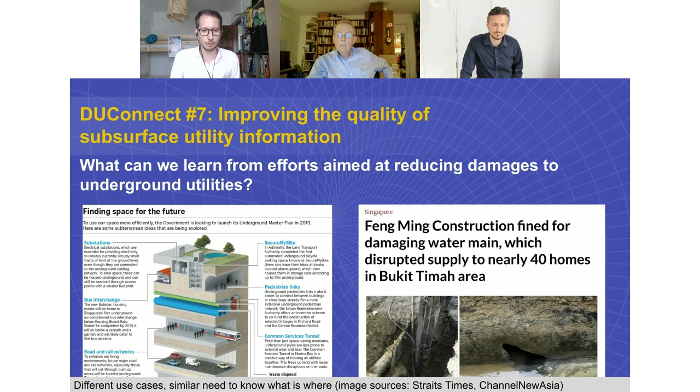That's why I'm very happy to have Geoff here. So we will move on to the main talk, which is titled 'Reducing the Risk of Underground Utility Damage Improves Construction Productivity' by Geoff Zeiss. Let me briefly introduce you before I'll hand over the floor to you.

Geoff tracks the contribution of geospatial technology to the digitalization of the construction and energy industries on his Between the Poles blog and other media. His area of special focus is locating, mapping, and sharing information about underground utility infrastructure. A white paper called 'Reducing Damage to Underground Utility Infrastructure During Excavation,' prepared by Geoff and Dr. Sakura Shinoaki, was recently released by GITA. In recognition of his efforts to increase the awareness of geospatial data and technologies in utilities and construction, Geoff received the Geospatial Ambassador Award at Geospatial World Forum 2014 in Geneva, Switzerland. He's also a member of the Digital Underground project of our advisory board, and he actively supports open standards as a director of the OGC, the Open Geospatial Consortium.

That's where Geoff's biography ends, and I just want to add a few more words to that, because Geoff, we're very happy to have you here. Sometimes when I talk about you to others, I jokingly call you a bit of a social media influencer, and I mean that in the best sense of the word. We're in a very technical, almost niche kind of world, but if anyone is considered an authority globally, I think a lot of people think about you when it comes to utility mapping, but also making data available. I think many of us in the field really appreciate what you've been doing in the past years or so, tirelessly capturing all kinds of things going on all over the world related to underground utility information, but also geotechnical information. I think we're just very happy to have you here.

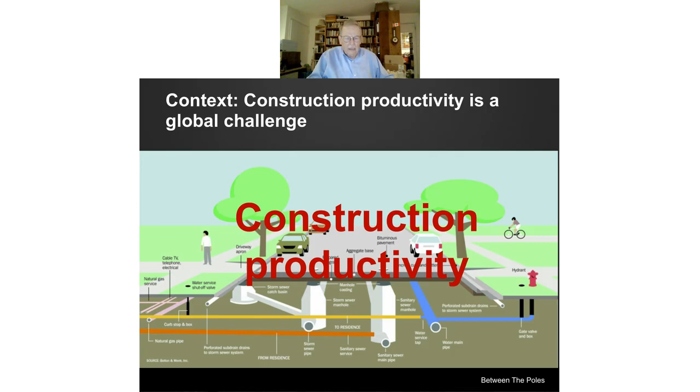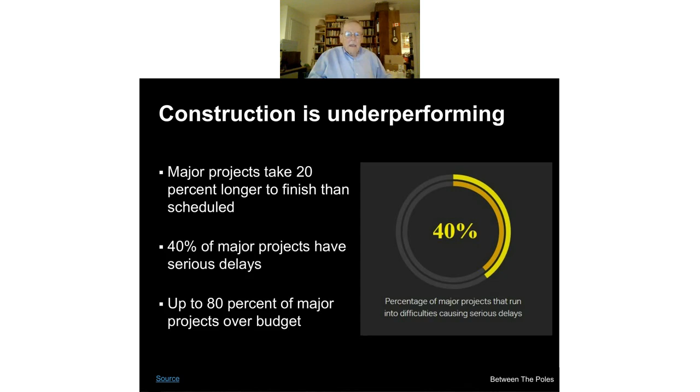One reason it's a big problem is there are more and more issues with major projects and other types of projects. These are some statistics from North America showing some of the problems with construction projects. If you're familiar with any major construction projects, you realize there's a high probability they'll be delayed and go over budget. This is an overview of some of the problems with the construction industry.

There are thousands and hundreds of thousands of contractors who do very specialized work. This is not a business of 3 or 4 big companies who do everything—there are thousands and thousands of small contractors. It tends to be adversarial. As a friend of mine said, when you do construction, you spend half your time actually doing the engineering, and the other half in litigation. It's characterized by low margins. In the UK, for example, the top 10 construction contractors, with an annual turnover on the order of 30 billion, have a margin of 0.35%. You wonder why anybody does construction with margins like that—they certainly wouldn't build airplanes and cars with margins like that.

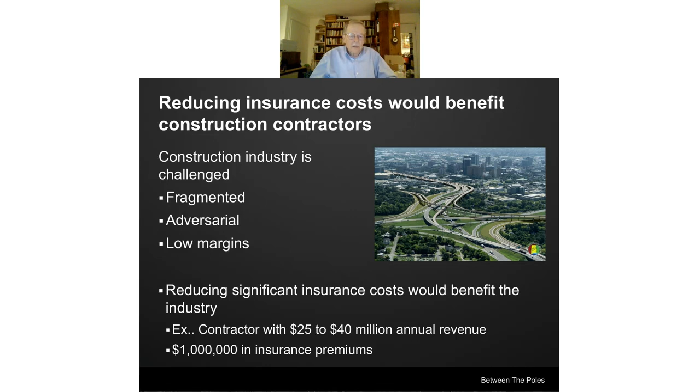One thing that's interesting about construction is that given those low margins, the industry pays significant insurance costs. If those costs could be reduced, it would contribute significantly to improving margins. These are some numbers I got recently from an insurance company in the U.S., estimating that a contractor with annual turnover of 25 to 40 million would pay $1 million in insurance premiums—that's a percentage of their turnover. Given their low margins, it would be really beneficial to reduce the risk of damage, which would translate into reduced insurance premiums. That gives some context for why this matters to the insurance industry.

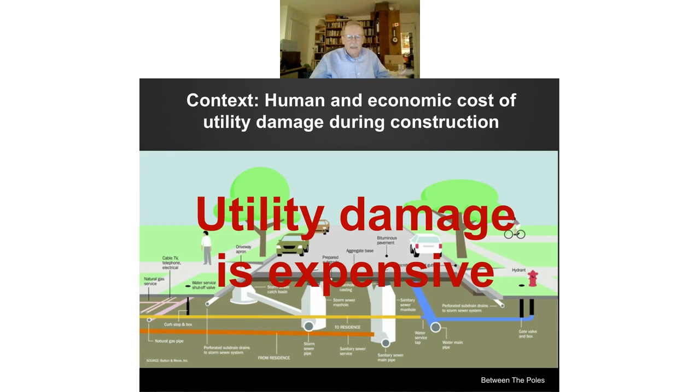The other thing about utility damage is that it's expensive—financially and economically—but it also costs lives and injuries. These are some numbers from around the world. The 50 to 100 billion annually in the U.S. is my estimate based on numbers from the CGA and research in the UK. In the UK it's harder to put a number on, but it's estimated to be billions of pounds. If you prorate from the US, assuming the UK is about 20% of the US population, you can figure out what that number might be. In the Netherlands, they've estimated something on the order of $1 billion.

The really interesting thing is whether these numbers include not only direct costs—what it costs to repair the pipe—but indirect costs: loss of custom, disrupted traffic, insurance costs, cost of litigation, and a long list of other indirect costs usually not included in these figures. Just to give you an example of two really important incidents, this happened in Belgium in 2004.

I'm sure that any folks on the line from Europe will remember this. This was just a devastating experience, and it was one of the reasons why in Flanders and in the Netherlands there are now sites dedicated to sharing information about the underground. It's called KLIP, K-L-I-P, in Flanders, and CLIC, or KLIC, in the Netherlands. I'll talk about KLIC a little later. But this was a devastating experience.

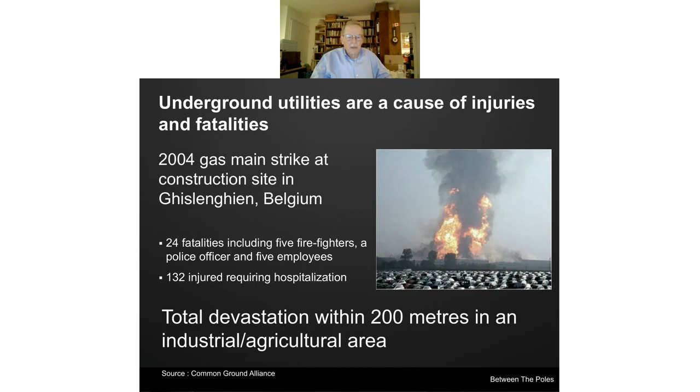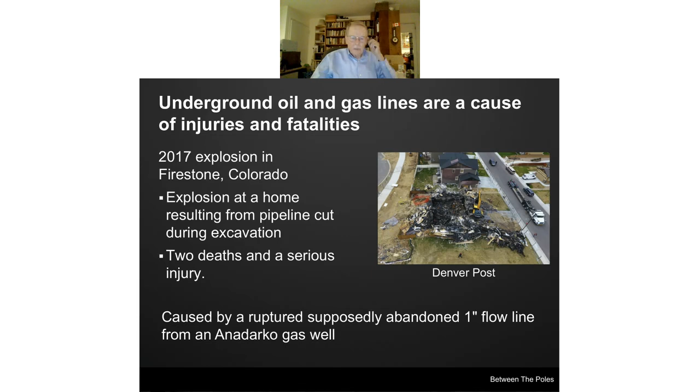This is a really important one. This happened in Firestone, Colorado. This also led to legislation. This happened in 2017, and by 2019 there was really radically new legislation in Colorado, and I'll talk about that. It led to a couple of deaths and a serious injury, and it was caused by a one-inch natural gas flow line from an Anadarko gas well.

Now you may say, well, this is just the way things are. There's things that are underground. We don't know where they are. We try to do things. We try to dig carefully. We try to take other measures to reduce that risk, but that's just the way business is. And if you look at the Netherlands, or the US, or the UK, the statistics are similar.

I'll also talk about Heathrow Airport, where they have also managed to do that, and they have statistics carrying from about 2003 which show a steady decline in the number of incidents, no matter how you define them, at Heathrow. So I think the important message is that something can be done about this, and I'll try in this talk to give you some indication, not from a technical point of view, but from the point of view of organization, of how to achieve something like that.

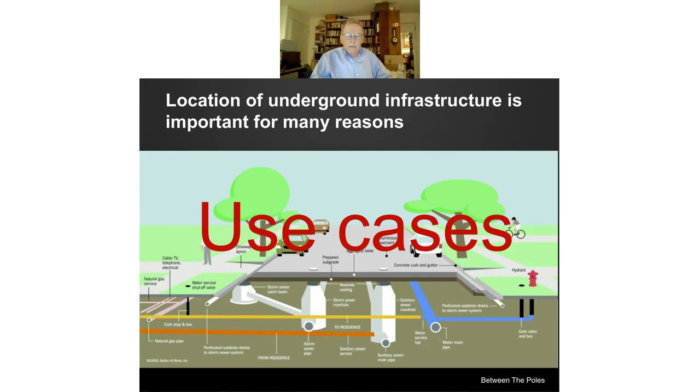There's a number of use cases that relate to how underground information can be used. Some of these were defined by Singapore. Some were defined in the UK as part of the National Underground Asset Register project. But these are just a few of them. Of course, street excavation is the obvious one, but this information is also very important for emergency response. You may want to know what's underwater, or what has been impacted by a flood, for example. Utility maintenance is obviously very important, to know where things are underground.

If you have an outage somewhere and you want to know what caused it and go find that piece of equipment, you can either — in Canada, for example — wander around in the snow looking for it, because the accuracy of as-built is pretty poor, and you have to use other means to try to find it.

Large-scale construction projects need to know where these things are because they often have to do relocations. If you're doing a highway project or a rail project, you have to relocate some utilities to make way for your project. It's obviously useful for disaster planning, smart cities, digital twins, strategic urban planning, and I could go on, but those are just a few of them. In this talk, I'm going to concentrate on street excavation, utility maintenance, and large-scale construction projects, which was really the focus of the NUAR project in the UK.

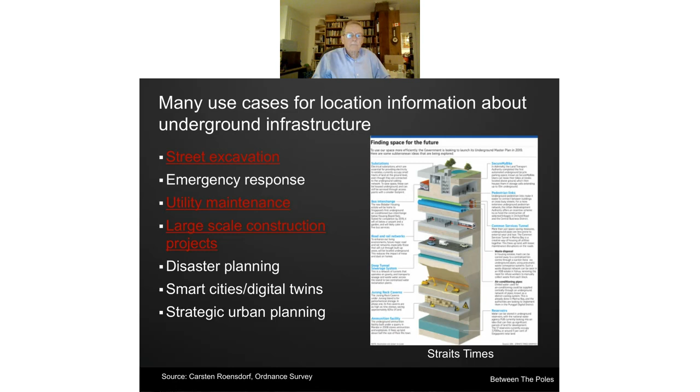So what I'd like to now do is go through some of the initiatives that I'm aware of worldwide that indicate what people are doing to solve this problem. And there's really two aspects to this.

One is, what do we do to record the location of new infrastructure as we put it in the ground? This, in the past, has generated what are called as-builts. And in many parts of the world, those are not really as-builts, those are as-designs. What actually goes in the ground is not what's recorded on the as-built.

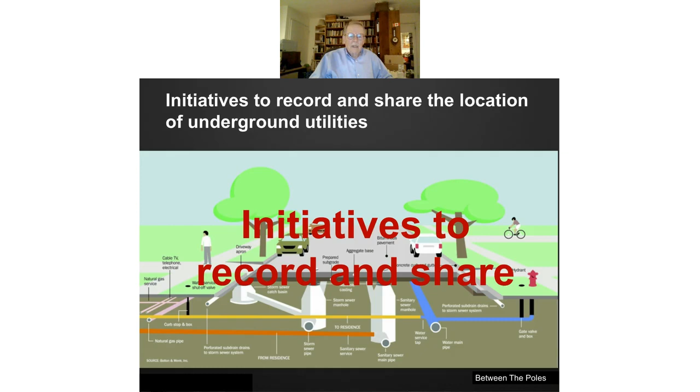And that is one of the real sources of major problems. The other aspect of this is, where is the existing infrastructure, and how can we improve the quality of our location information about existing infrastructure? I'll talk about some of the ways that some organizations are trying to do that.

Just to give you some context, it's estimated in the US that something like $10 billion is spent annually finding things underground. And as I said at the beginning, this information is rarely shared. It's usually recorded for the project, but after the project completes, that information is lost.

And if you come and do a project involving excavation in the same place, pretty much the same process will happen. You'll call the one call center, people will come out with their magic wands and GPR push carts, and they will try to find all that stuff again. They'll paint the ground, and that can happen year after year. That is a real waste of $10 billion.

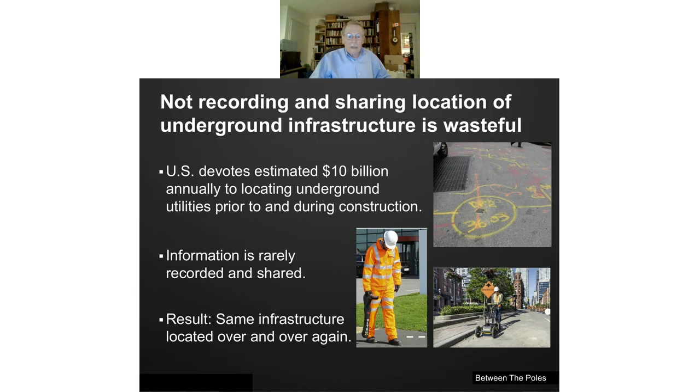A number of jurisdictions around the world have tried to deal with this problem. These are just a few of them that I'm aware of. I won't go through all of these, but this is worldwide, where people have recognized the problem and are trying to address it.

I will mention that Tokyo was one of the first that tried to do something about this, with a system called RODIS — it was actually the Road Information Center, RODIC, but the system was called Road Information System.

I guess the way I would put it is that if Moses stuck his staff in the ground in Tokyo, he'd hit a lot more than water. He'd hit telecommunications, electric power, a lot of underground infrastructure. It's the same thing if he stuck his staff in the ground in Heathrow Airport, and we'll come to that later.

There are different ways that people are organizing the sharing of information. In some jurisdictions, the government just comes in and says, you have to do this. PHMSA in the United States is an example, and I'll spend some time on that. But there are examples around the world where it's basically government mandate.

Thou shalt do this. In some cases, it's government voluntary. Scotland, for example — the Scottish Vault system was originally, and still is, government sponsored, but it's voluntary. The utility operators don't have to do it; they're not required by law to do this. Legislation has been passed in the Scottish Parliament to make this mandatory, but as of right now, it is still voluntary.

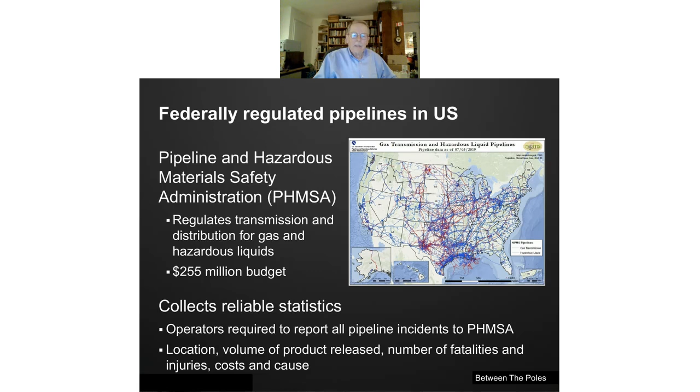This is not just construction damage, but any kind of leakage involving pipeline. Federally regulated pipelines have to be reported to PHMSA, and it includes quite a lot of information: the volume of product release, the number of fatalities, injuries, costs, and cause. This is probably the ideal of the kind of information you'd want to collect for these incidents.

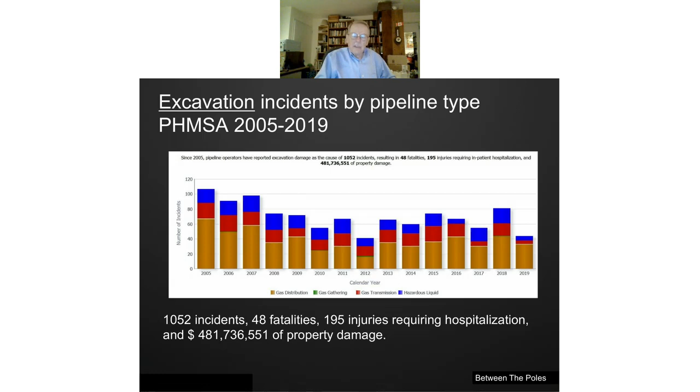They publish statistics starting around 2005, and these are some of the statistics specifically for excavation incidents over that period of time. You can see there were 1,000 incidents, 48 fatalities, 195 injuries, and $500 million of property damage. That's very useful information. You can get similar information from the KLIC system in the Netherlands, for example.

Now, this is a very recent initiative—I think it began only about a year ago. This is in Montana. It's basically a regulatory rule that specifies you have to do an as-built survey, accurate to about 1/3 of a foot—3 or 4 inches, somewhere between 8 and 10 centimeters. Most importantly, it has to be certified by a professional engineer or professional land surveyor. To put it bluntly, that means there's somebody you can sue.

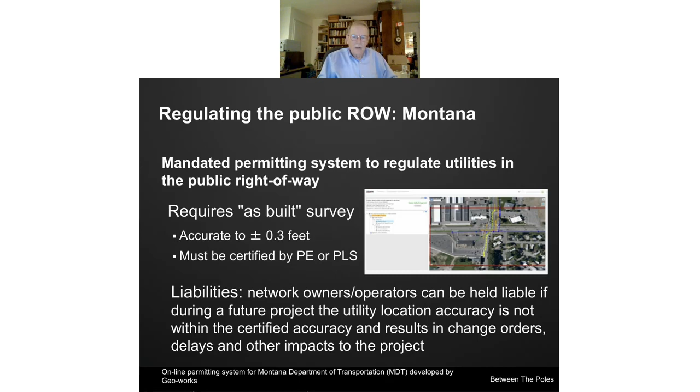That points to the whole issue that's always the elephant in the room, and that is liabilities. This regulation specifies that network owners and operators can be held liable if, during a future project, information about where this new infrastructure was installed is not accurate. Now, that's maybe what the law says. In practice, something else often happens—you're dealing with a small contractor up against a large utility, and the large utility has a lot of lawyers, the small contractor doesn't. So in practice, almost invariably the contractor is held responsible. We'll come back to that.

Another example is Colorado, and this is a bit different—I think this is one of the things we're going to see increasingly around the world. In one-call centers in North America and elsewhere, you're required to call the one-call center 3 days before the construction contractor or excavator puts a shovel in the ground. Not before design, not during planning, but 3 days before you put the shovel in the ground. So you're doing all your design blind—you have no idea what utilities are out there. You design as if it's greenfield, as if nothing else has been out there before.

This is what I think is really remarkable about the Colorado legislation: it requires a subsurface utility engineering survey prior to design. That means you have to know where things are to ASCE quality level B, using remote sensing technology prior to design. So instead of just sending the survey crew out to find the above-ground stuff, you now also have to know where all the below-ground stuff is before you do design. This is going to dramatically reduce the number of unnecessary and expensive utility relocations. So that's really a groundbreaker.

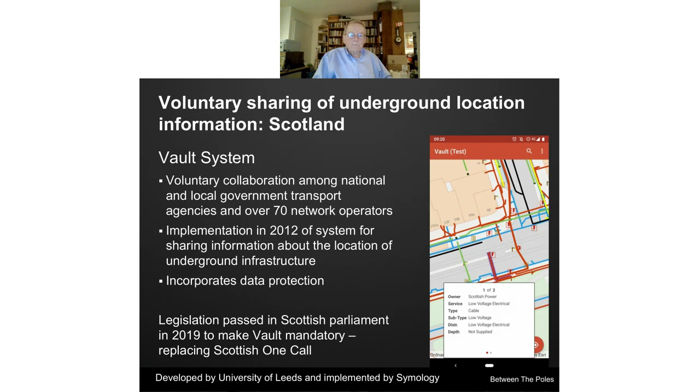It's different from the KLIC system in the Netherlands, for example. The KLIC system in the Netherlands basically relies on as-builts. You contact the KLIC system, you say this is where I'm going to dig, and within, I think for almost 95% of cases, within 24 hours, you'll have access to all the as-builts from all the utilities and telecoms operating in that area.

In North America, that's not the way it works. You contact the one-call center, and because as-builts are notoriously inaccurate, what typically happens is several vans converge on your site using electromagnetic wands, EML, and ground penetrating radar sensors in some cases, and they paint the ground. It sounds a little more labor intensive, which it is, than the KLIC system. It's not as efficient, but it is more reliable than using as-builts.

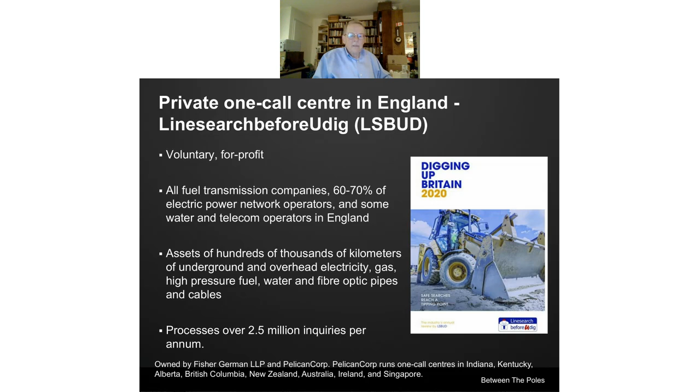As I mentioned, in England and Wales there's a LinesearchbeforeUdig system. This is actually a private company, owned partly by Pelican Corporation. They don't cover all utilities in the UK, but they cover all the hazardous fuel transmission, gas and oil, and a high percentage of the electric power networks and some other things as well. They process 2.5 million tickets every year for people wanting more information about what's underground.

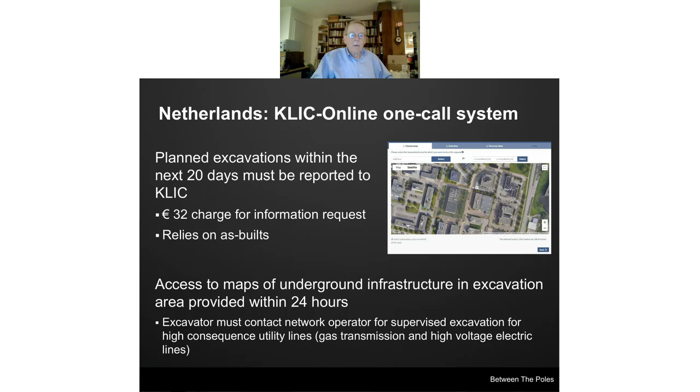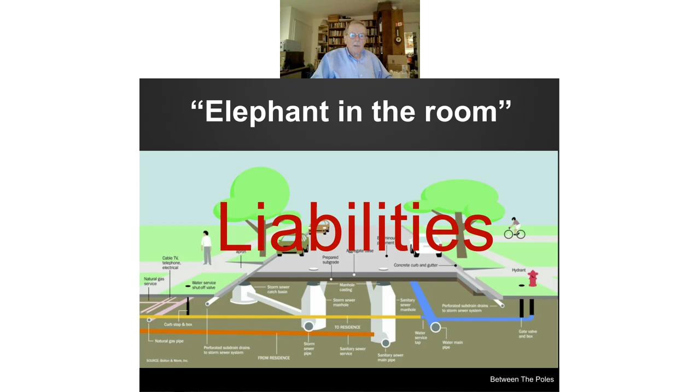Now, this is the elephant in the room that I mentioned, liabilities, and I'll talk briefly about some of the ways people try to address this problem in different parts of the world. As I said, there are alternative liability models. The major one in many jurisdictions is that the contractor is liable—this is not by law, this is just by the way things work.

The construction industry is fragmented—there's a lot of small contractors, and for a small contractor to go up against a big utility is usually considered a waste of time. So in most jurisdictions, though not always—there are cases where a large contractor will take a utility to court, recently in San Francisco there's a $500 million suit in California—but in most cases the contractor is liable. This applies in the US, UK, Canada, Australia, and other places.

In France, there's what's called a network owner-contractor shared liability model, where there are rules that say if the location of the asset that was struck was reported accurately, then it's the contractor's responsibility. If it was not reported accurately and the contractor hit it, then it may be shared 50% to the contractor, 50% to the owner. Or if it was really unreliable, then the network owner is totally responsible for the liabilities.

I'll talk a little bit about Montana and Calgary, where there's an attempt to make a shared liability problem. But again, these are North American jurisdictions, and the reality is often that the contractor is responsible.

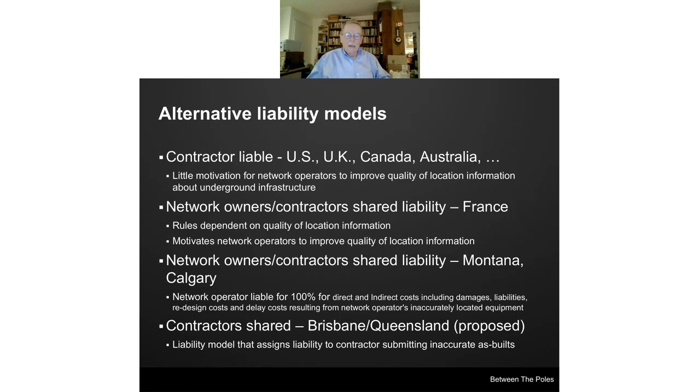There was a very interesting proposal, which I don't know whether it was implemented, in Brisbane, Queensland, where the contractor that put the infrastructure in the ground, working for a network operator, submitted as-built drawings. When anybody else came and worked in that area, those same as-built drawings would be provided to those contractors. If that contractor found problems, the original contractor could be sued for it. In other words, the network operators weren't really involved — it became a legal problem between two contractors. It's an interesting idea, but I don't know whether it was actually implemented.

State of Montana — this is a big thing, similar to what has happened, not mandated in Singapore, but has happened de facto in Singapore. The most important aspect is that as-built drawings have to be certified by a PE or PLS — a professional engineer. And when you say certified by a professional, that means they can be sued, and that means liabilities.

The law in the state of Montana also says that network owners and operators could be held liable if their data is inaccurate. Now, in practice, it may be different. The law sounds good — it sounds like the network operator would say, okay, that's my fault, I have to take responsibility for it. The reality is that often the onus still remains with the contractor.

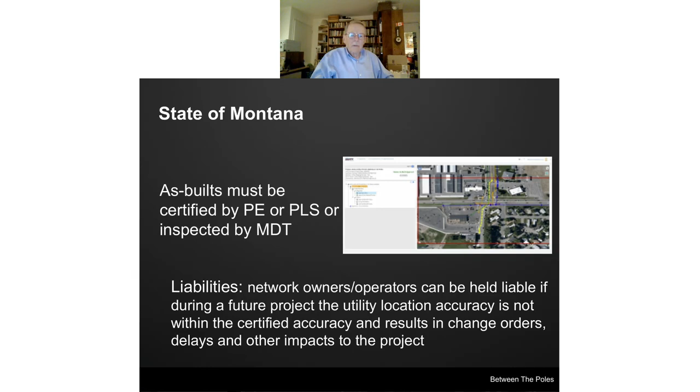The City of Calgary has something similar. Many years ago, they passed a law that said any underground work in the city had to result in the submission of as-built drawings to the city with a specified accuracy, according to Canadian standards for quality. It provided for inspections by the city and specified shared liability models based on how accurate the as-built drawings were. Again, in practice, what actually happened may not be what you'd expect by looking at the bylaw.

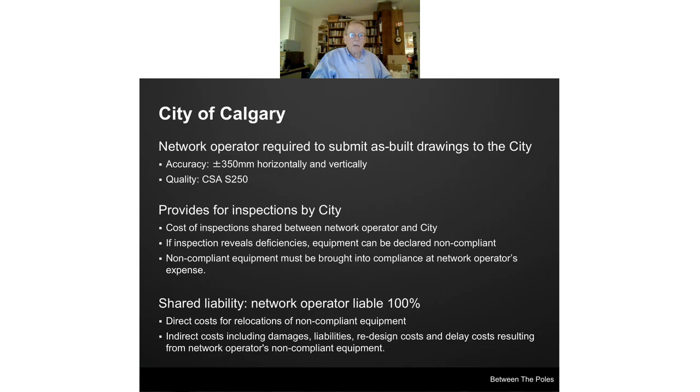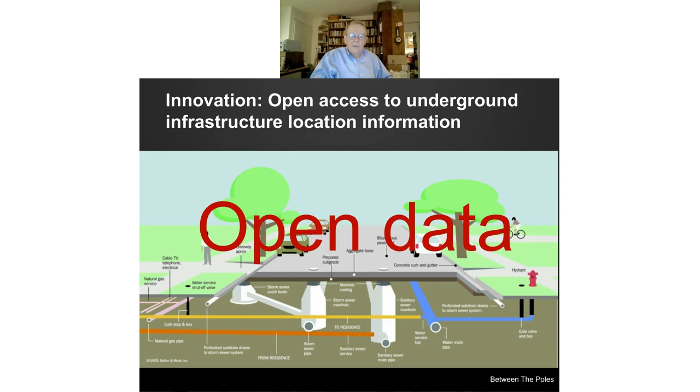Now, one of the most interesting things happening these days is open data. This has affected water more than anything else, but it's beginning to affect other things. I'll give you a really interesting example for oil and gas in Colorado, and also what's happening in the city of Rotterdam. This was the result of the Firestone disaster, because that was a flow line from a natural gas fracking well in Colorado — there's something like 17,000 miles of flow and gathering lines in Colorado.

As a result of that, legislation made the COGCC responsible for collecting data about the location of these lines — not highly accurate, something like 25 feet or so. But the most remarkable aspect was that this data is publicly available on a map. If you're interested, I can send you a link so you can see all the underground flow and gathering lines in the state of Colorado, which is remarkable. I think it could be a model for other places to adopt as well.

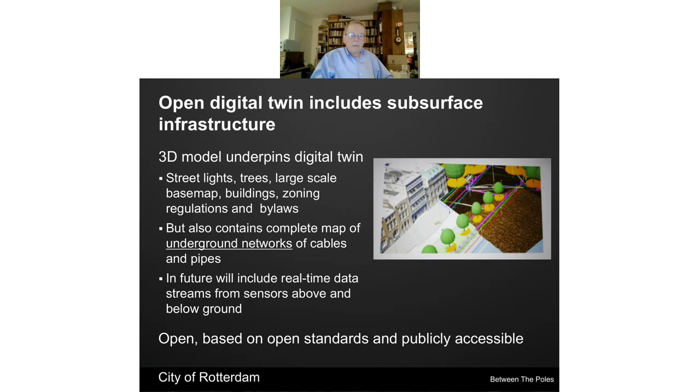This is what I mentioned about the city of Rotterdam, where they are creating an open digital twin of the entire city, including both above ground and below ground. This was also the objective of the Iceberg project in the UK, to make sure underground infrastructure was included in the digital twins of London and other UK cities. The interesting thing about Rotterdam is that this is open data, based on open standards and publicly available. So that's open data.

Another aspect of this is reliable statistics, and this is really a big problem, because as Peter Drucker said, if you can't measure it, you can't fix it. I'll give you some examples where we say, well, we've done all these wonderful things, and we think we're reducing the number of incidents of underground damage and the total cost of underground damage.

And the fact is that often the statistics show that that is not what's happening.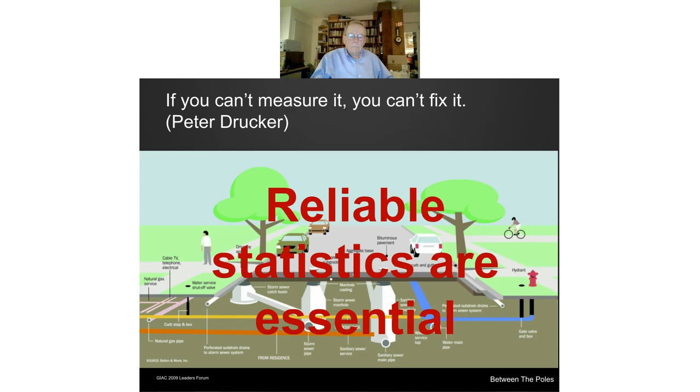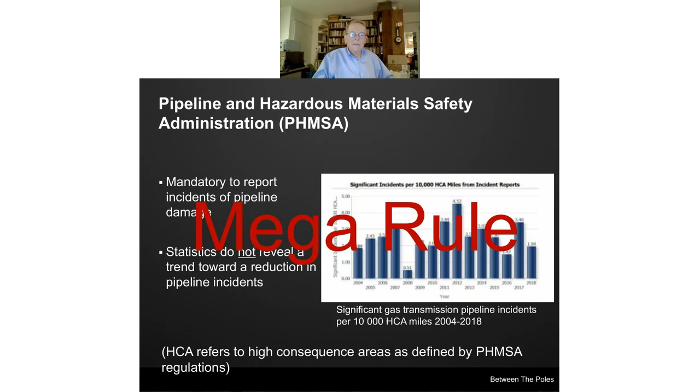I mentioned PHMSA before, the Pipeline and Hazardous Materials Safety Administration in the United States. Their statistics have this HCA designation, which lets them prorate stats to give you some idea of construction activity and miles of gas pipeline. In the U.S., PHMSA statistics show that, in spite of everything PHMSA has done, there has been no reduction in damage.

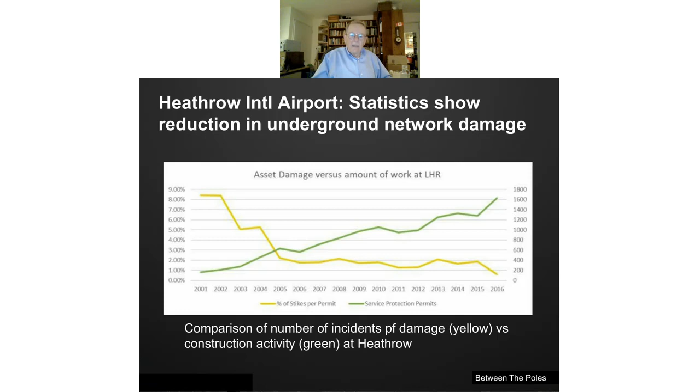This is Heathrow Airport, in contrast, where the green line gives some indication of construction activity, and the yellow line shows, since about 2001-2002, the number of incidents of underground damage resulting from excavation. You can see it has steadily declined.

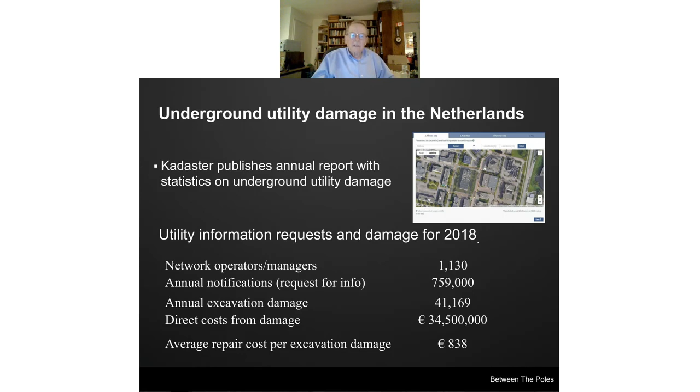I'll also mention KLIC in the Netherlands, where some very interesting statistics are collected because it's mandatory to report incidents: 759,000 notifications every year, 41,000 incidents, and you can see the total costs and cost per incident. The statistics show that so far the KLIC system has not reduced utility damage during excavation. It's had some other remarkable achievements, but it has not reduced underground damage during excavation.

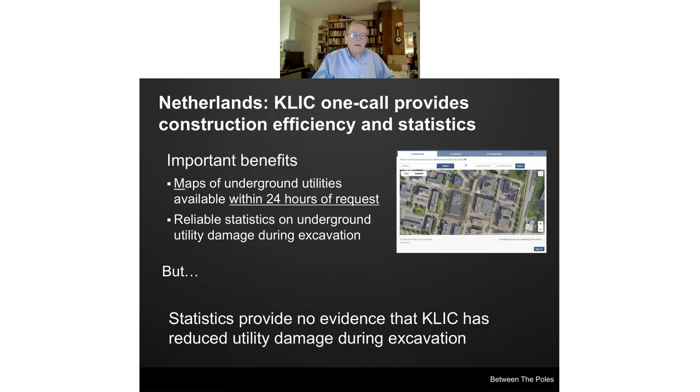So I think the conclusion is there's no silver bullet. If you look at what's happened in Japan, where there has been a comprehensive program since 1985, it has resulted in a remarkable low number of incidents. I won't go through all of these things, but it involves construction contractors, network operators, governments—all stakeholders in building, constructing, and maintaining underground infrastructure.

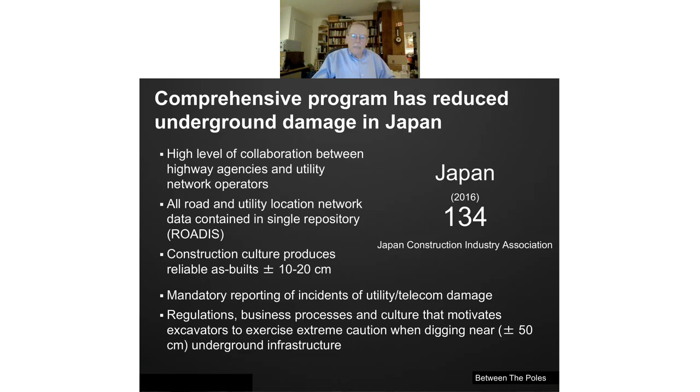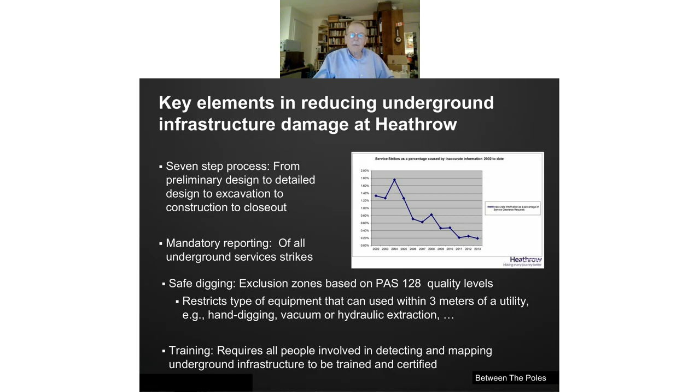You can see the same thing at Heathrow. Here's another way to look at their statistics, but it's the same story: a comprehensive program, a 7-step process involving mandatory reporting, safe digging using exclusion zones, and training. People have to be certified and trained if they're involved in underground mapping.

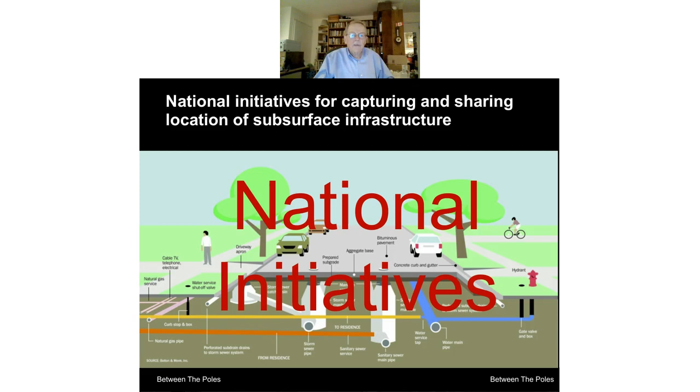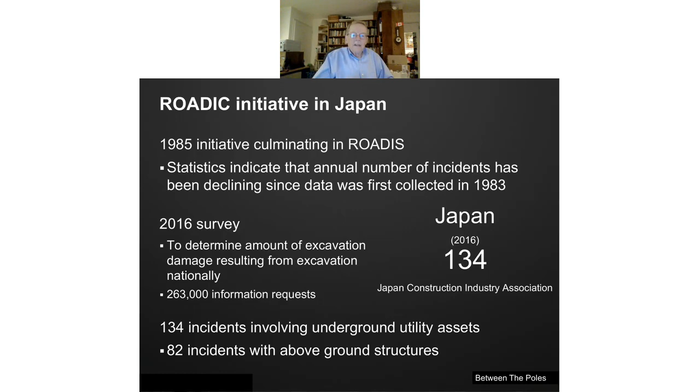There are several national initiatives underway—I've already mentioned a couple—trying to implement something at a national level to reduce underground damage. I mentioned the ROADIC initiative in Japan, the Road Information Center, starting in 1985, which has dramatically reduced the number of incidents in Japan. There's also the National Underground Asset Registry initiative in the UK, funded by the Geospatial Commission.

There have been two pilots to date, in Northeast England and Central London, also supported by Project Iceberg, which I mentioned already. These are remarkable for the degree of cooperation involved—altogether something like 40 utility operators and government agencies came together to share information. Probably the most important part of this initiative was developing a legal framework and legal data sharing agreements between all the parties.

The actual implementation of the pilot technology ensured what's called data protection, which is absolutely essential if you want telecoms involved, because telecom information is very competitive and they don't want it used by competitors to find out where their network facilities are. This project succeeded in bringing telecom operators, utility operators, and government agencies together to share information.

This is really a remarkable effort, and they're currently in the process of trying to turn this into a tender—an invitation to tender for a national system for England and Wales.

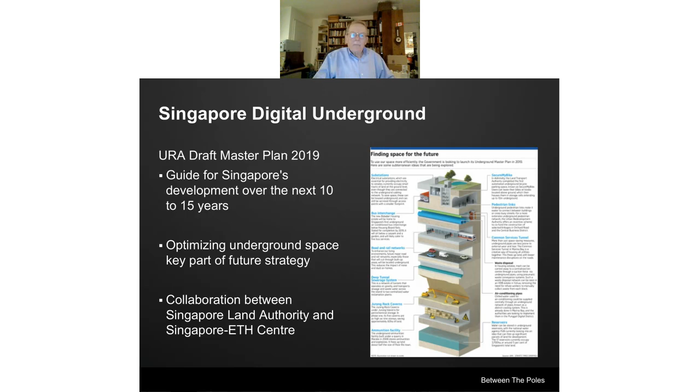Developing a comprehensive approach to managing underground infrastructure. I mentioned previously, France was one of the earliest ones to do this, in about

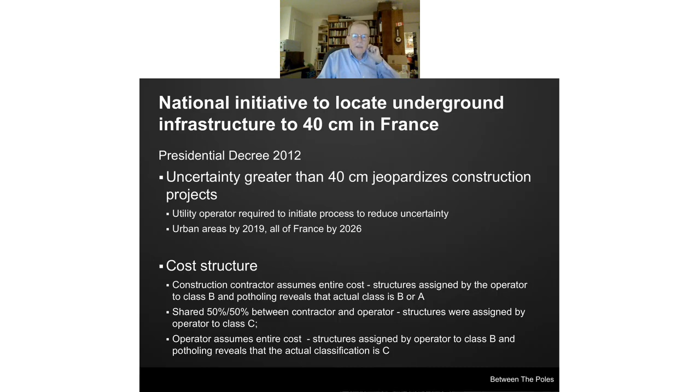So just some of the key elements that I've found over the years. You can find something like 25 recommendations I've made in the white paper that Rob mentioned at the beginning, on the GITA site, where you can download that. But as I mentioned during this talk, you need to have reliable statistics. You need to know what the situation is now and whether these programs that you implement actually do something.

I haven't talked about technical aspects at all during this, but there have been some remarkable technical advances, both in detecting underground things and online cloud-based systems, mobile-based systems for sharing the information in the field, collecting data during construction, and so on. You need policies, procedures, regulation, business processes to improve the accuracy, timeliness, and completeness of as-built data.

You need to have more sustainable design, which in other words, when you design, you need to know where your underground utilities are. That's one of the remarkable things that Colorado has done. There has to be a high degree of collaboration between the network operators, the consulting engineers, contractors, and project owners. Basically, all stakeholders in the construction project have

to be involved. The construction industry has been very slow in digitalizing, and so one of the things that really has to happen is digitize. And as mentioned, there are companies that do this. LocusView, for example, is a really good example. There's ProStar Corporation in Colorado that's done it. GeoWorks in Montana has ways of digitalizing the capture, sharing, and updating of location information.

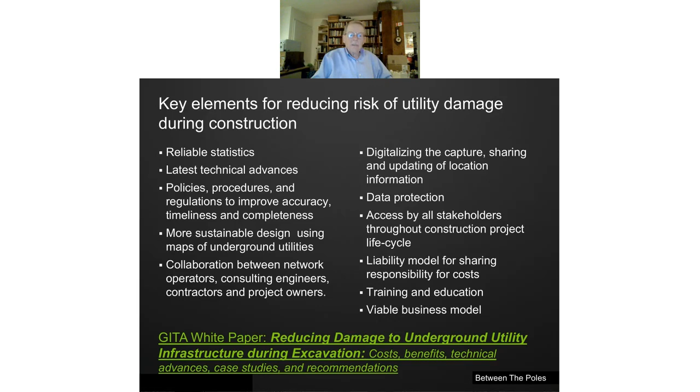mentioned here. So thank you very much for your attention. I hope this has contributed to your understanding of some of the things being done around the world. As I said, I didn't attempt to talk about the technology at all, but I think it is remarkable that the awareness now has really stretched to just about every jurisdiction in the world, and people are doing very creative things to capture, share, and improve the quality of underground information. So thank you very much.

All right, I was talking to myself, let me restart.

So again, thank you very much, Geoff. This was fantastic, a very insightful overview of the various initiatives overall. It's quite important and relevant to have insight about what is happening across different regions, and what are the lessons learned, and how we can pass lessons from one initiative to another. We often see various government and private initiatives reinvent the wheel and recreate strategies and methodologies already developed elsewhere. So I'm glad that SLA is taking the initiative to first understand the landscape and develop a system that builds on previous experiences. Thank you very much.